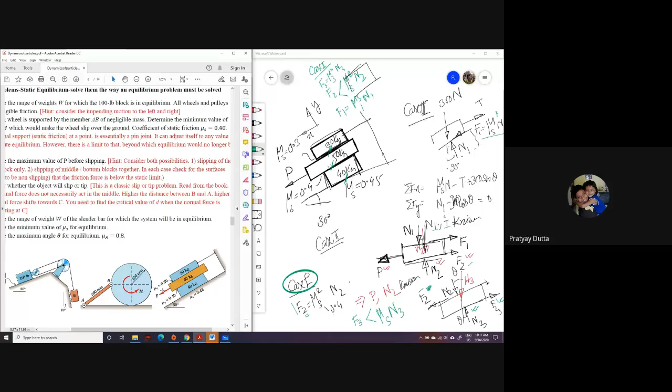Assume F3 is less than mu_s times N3 in case 1. Now assume F3 is mu_3 times N3, okay, and then check that F2 comes out to be such that F2 must be less than mu_2 times N2, verify that.

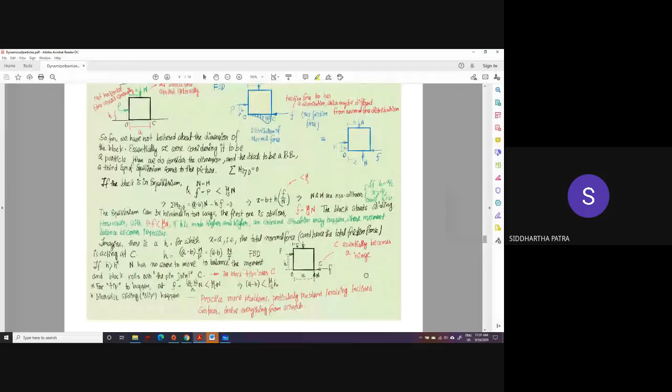So we'll try to solve one such problem. I don't see that problem over here, but I guess I have it somewhere.

Okay, so this problem number 71. And as you can see, it's not the same diagram. It's a little different than that. It has a force, not exactly horizontal.

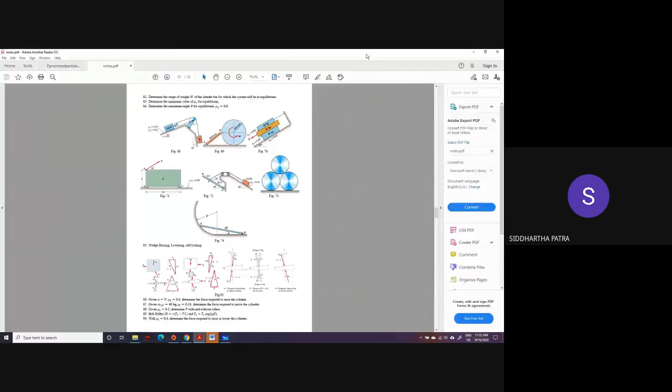Okay, problem number 71.

Now, this is somewhat represented like this. Here it becomes a rectangle, so basically it has two small legs, B and C.

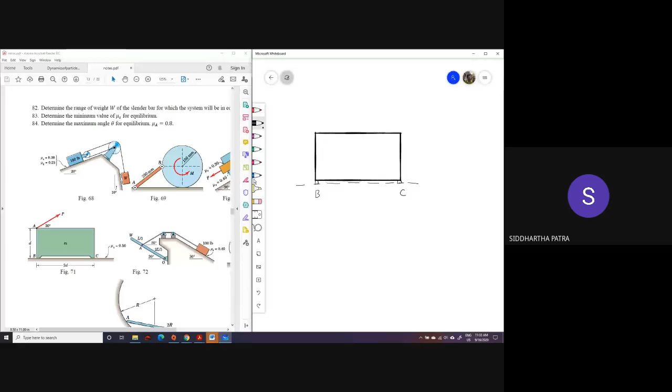Basically what is being represented over here, it is only supported at B and C. So there would be two reaction forces coming from B and C, not a distribution of forces, but two forces. Now this length is mentioned to be 2D, and this length is D, and here you are applying a force P at A at an angle of 30 degrees. And this has a mass of M. So what are the forces coming on it?

The force on this one is mg, exactly in the middle. And there would be a normal force coming from C and a normal force coming from B.

Okay, so again the question is, if the coefficient of friction mu s is 0.5, will the slipping occur first or the tipping occur first?

So let's draw the free body diagram for this one. At B there is NB, and since I'm trying to push it towards positive x, the friction force is in the negative direction. So I'm showing the total friction force, FB and FC. FB and FC together act along the same line, so basically they can be shown as a single force. So there is also NC.

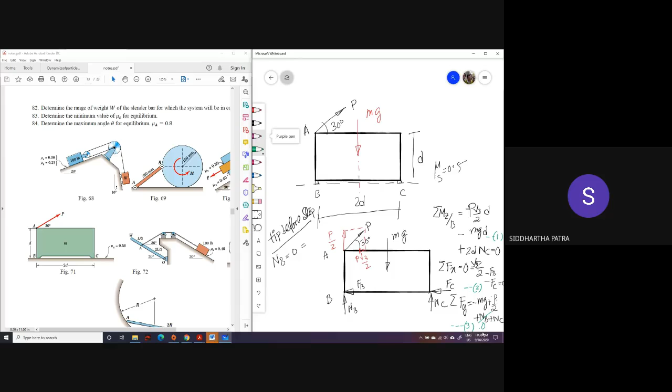Which means fb is also equal to 0, or for that matter it doesn't matter. So take nb equal to 0. Now you have 3 equations. Note this: in equation number 1 and equation number 3, since I have assumed this to be 0, you have variables nc and p. No question of friction force here - friction force only appears in fx, in the second equation. In the first and third equations there is no friction force, which means you can solve for p and nc from equations 1 and 3.

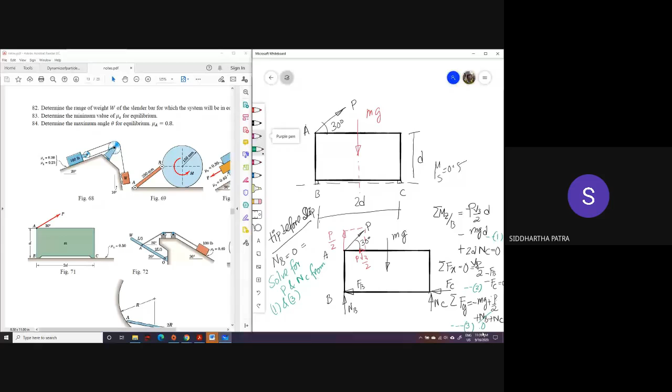Now once you solve for them, since there cannot be any friction force without the normal force, Fb is also 0. So from equation 2, solve fc, and check if fc is less than mu s times nc.

But if this fails, then slipping occurs first, and otherwise tipping occurs first. So can you check for this one whether the object slips first or tips first?

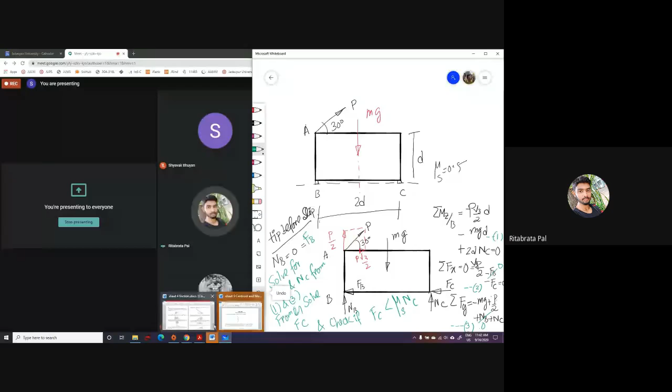In this case, the normal force and the friction force are coming from two locations, and there would be a situation when the object lifts off from this support. Then I'm considering a case when tip occurs before slip - it cannot slide but it will try to roll over C. So at that time there is no support from B, so there is no normal force as well as any friction force. The entire support is coming from C, and C is basically acting like a pin joint. So that is the case we are considering here.

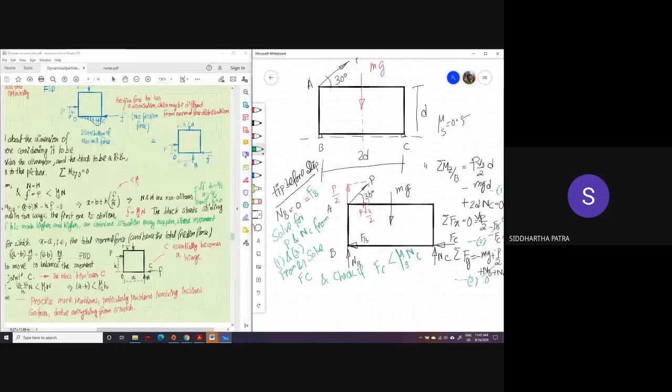আরো দু একজন টিপ একটু দেখো। করবে না, মানে এফসিটা বেশি আসছে। এফসি বেশি আসছে? স্যার মিউএস ইনটু এনসিটা বেশি আসছে। মিউএস এনসি বেশি আসছে। আই গেস এফসি শুড বি উইদিন লিমিট। মানে এই প্রবলেমটাতে যদি আমরা একটু ভালো করে দেখি, এখানে

ফোর্সটা, there is a vertically upward part, okay, which basically would try to lift the object. মানে এটা একটু চোখে দেখলেই খানিকটা বোঝা যাচ্ছে যে এটা it will try to roll over C, but I may be wrong. Let's just check.

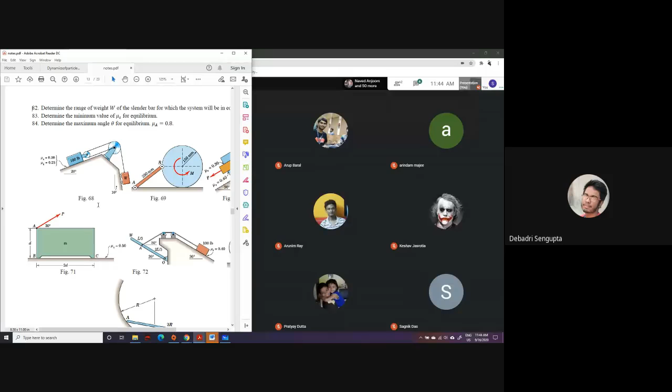মানে তোমাদের ক্যালকুলেশনটা একটু চেক করে নাও যা করছো, মানে দুটো কেসই হতে পারে, যা হবে তাই লিখবে, যে স্লিপ অর টিপ যা হবে তাই লিখবে। স্যার বলছি স্লিপের সঙ্গে টিপ করতে পারে, মানে দুটো না না, দুটো একসঙ্গে কখনো হতে পারে বা কিছুক্ষণ ডিস্টেন্সের পর বরং কিছু হতে পারে না। এখানে গল্পটা কিছুক্ষণ পরের নয়। সো হিয়ার দ্য থিং ইজ ওয়েদার দিস হ্যাপেন্স অর দ্যাট হ্যাপেন্স। মানে তোমার যদি জিনিসটা উল্টে যায় তাহলে স্লিপ করবে কখন, আর যদি স্লিপ

করতে থাকে তাহলে টিপ করবে কখন। যদি স্লিপ করতেই শুরু করে দিল, you cannot increase the friction force any further. Okay, now probably it is possible that you are gradually increasing the external horizontal force even when it is slipping. Okay, so the object may be accelerating, but at that, yeah, it may be possible that when it started slipping, after that it will also tip. Okay, it may be possible, but when it started tipping after that slipping, I'm not sure. আমার মনে হচ্ছে না সেটা পসিবল। ওকে ওকে স্যার। ওকে

ওকে, তো তোমরা কি সবাই স্লিপ পাচ্ছ এই কেসটাতে? ইয়েস স্যার আমার স্লিপিং আসছে। আচ্ছা, হতে পারে স্লিপিংই তো আসছে, এফসি বেশি আসছে। এফসি বেশি আসছে। আচ্ছা, ঠিক আছে, তাহলে হতে পারে যে অবজেক্ট হয়তো স্লিপ করবে ফার্স্ট।

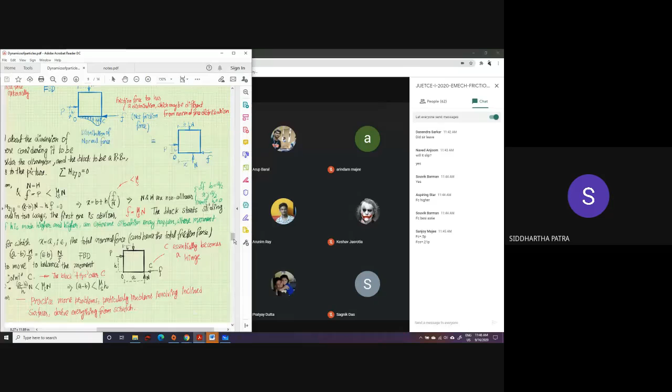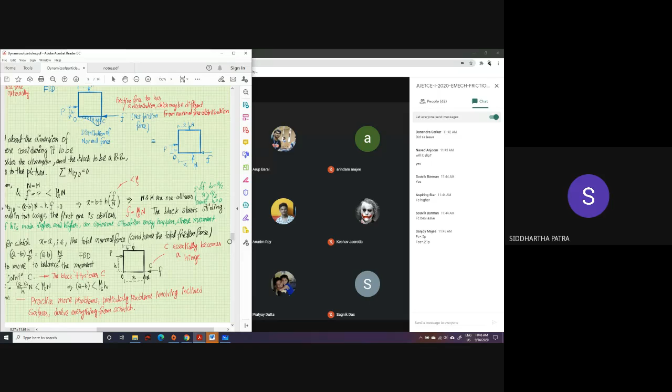Okay, so with that we can conclude our discussion on friction. Obviously, these are not the only problems. There will be a lot of problems, and some of them are of different variant. Some of them including, just like we have seen this, the ones with pulleys and connected bodies. Okay, সেরকমও থাকবে, ঠিক আছে? So I'm guessing you should be able to solve them. Okay, if you face any problem, you let me know, and with the remaining time we can at least introduce

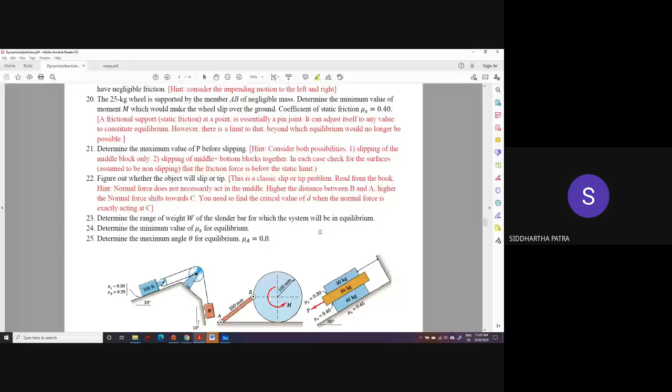properties of surface, and in the next class, possibly this Saturday, ঠিক আছে, যদি স্যাটারডে তোমাদের এই সময় ফাঁকা থাকে তাহলে আমরা নিতে পারি, will discuss on the remaining part of properties of surface. ঠিক আছে।